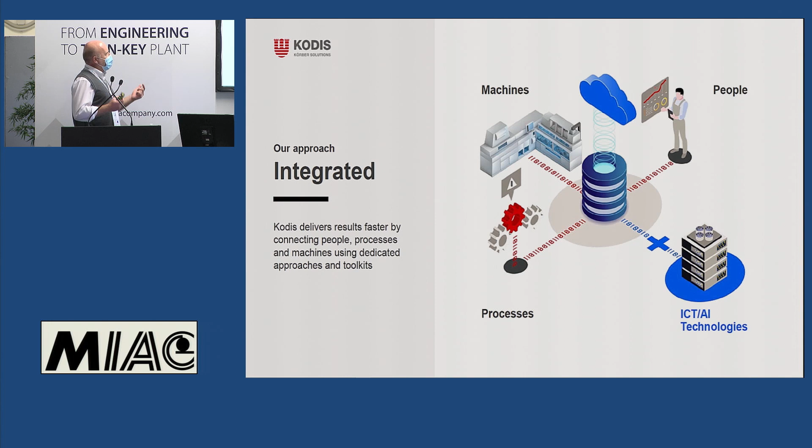With the MOM, we have a wider vision because we are considering all the activities, all the tasks that come from the in-feed of the material to the outbound of the material at the end, and all the operations inside that can involve automatic equipment or people activity like handling material, making quality tests, and so on.

If we consider the different layers of value, if we start from the physical layer, that is the control of the equipment, we can say the standard PLC HMI, and if we move up to the ERP or the systems that are over the factory, like artificial intelligence, moving up from the equipment to the top, the value that you have from the information is increasing. The missing layer, that is the MOM, is the one in the middle. It's the one that closes this missing gap and moves the information from the bottom to the top.

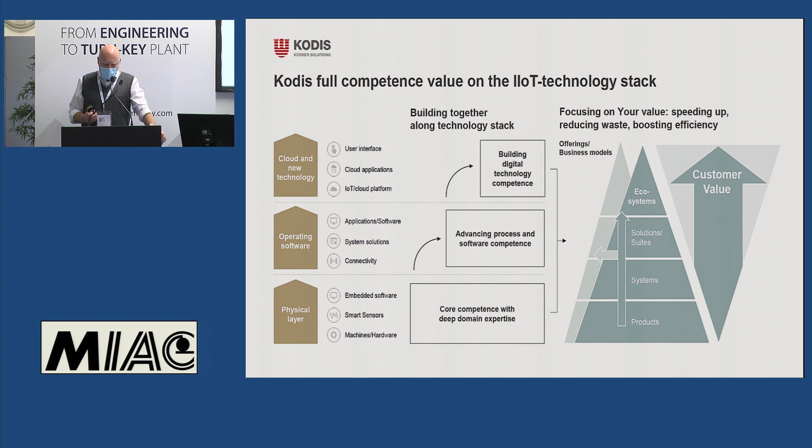This is an example of factory processes that you normally have. So you start from the raw material in-feed, you move the material to the warehouse. From the warehouse, you have to prepare the material for the production area. In this case, you have the different steps of production. You can have storage of semi-products before the final product, and you have additional material that has to be moved and synchronized with your operation.

So all these factory operations need to be split and divided into different small tasks that can involve people, can involve machines, can involve AGVs, if you have some automatic movement of the material inside the factory. And this is the layer of the entire MOM solution.

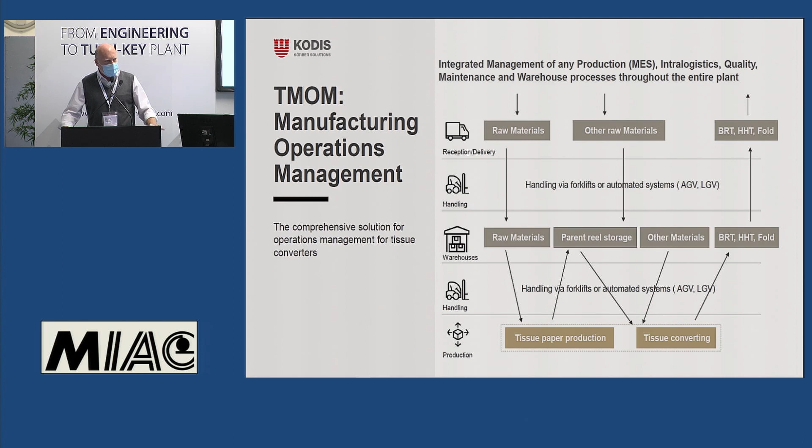Here there are some questions, a list of questions that you may ask yourself in order to understand if some of these issues or pain points are present in your factory, in order to understand if you have this kind of missing layer that needs a MOM solution that organizes everything. For example, if we consider one of them, the paperwork, the second one.

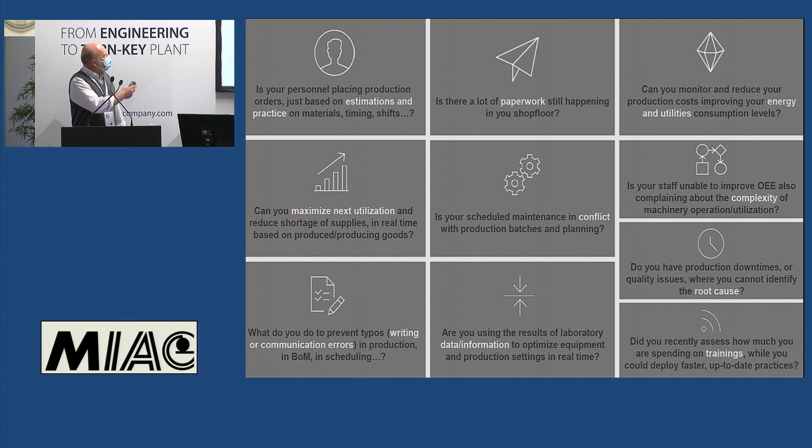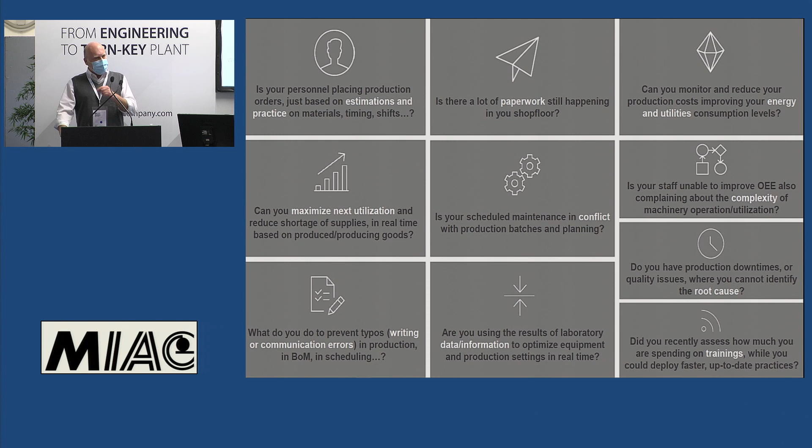So if you still move all your information and data to the operators, in order to execute all their activities, with a lot of paper. Also to retrieve information, you need to collect the quality checks, all the information of the production on paper, and transfer this paper later on into your ERP system. All this can be done automatically by a MOM system, a software that keeps the ERP synchronized, always in real time, and transfers via interface all the information to the operator without the need for any paper around the factory.

As well for material validation. If you have situations of waste in production because there is no control of the material that is moved from the warehouse to the production area, and there is no validation of the material, there can be mistakes. The operator has a paper list and has to check one by one, but there is no validation, no verification.

In that case, you can have waste in production, and this waste can be reduced using a software that organizes all the movement, requests the material just in time when it's needed at the line, and ensures that the correct material with the correct code is provided at the right moment.

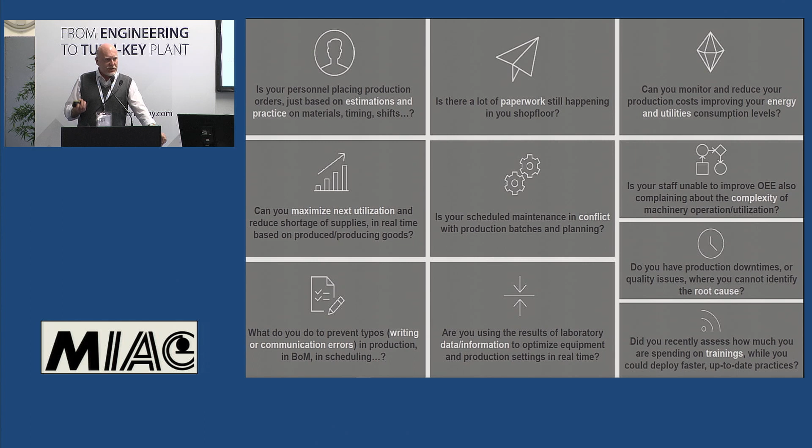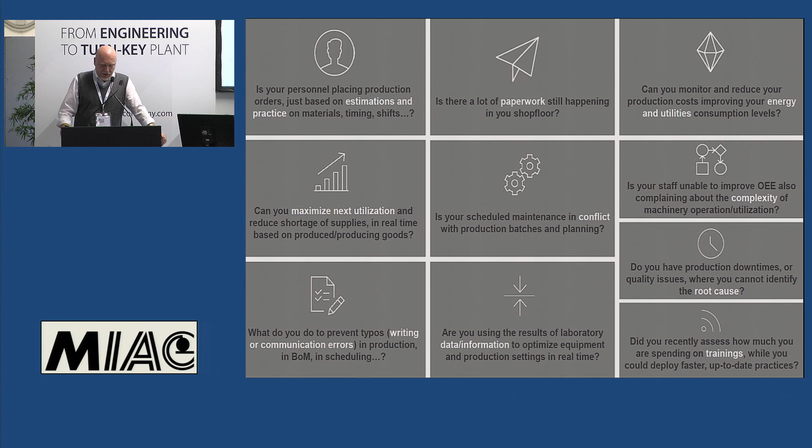Another thing, which you can also see in the demo later on in our booth, concerns energy. If you have no measurement of your consumption and your energy, you are not able to understand the cost of your product. So if in your factory you don't know exactly the cost in terms of energy of each unit of product, a MOM solution that collects all the information on energy consumed and merges it with the production scheduling is able to calculate exactly your unit cost. So all these questions that you may have in your factory can be solved with a MOM solution.

So at the end, if we want to resume what MOM means, or which are the operations of the factory, you can consider these 4 pillars. One is related to the maintenance of the equipment. One is the production, organization, and operation. Normally, the production pillar is what we call MES. We have the quality operation that must be organized, and the inventory. For inventory, we mean warehouse system, intralogistics, material handling, and movement.

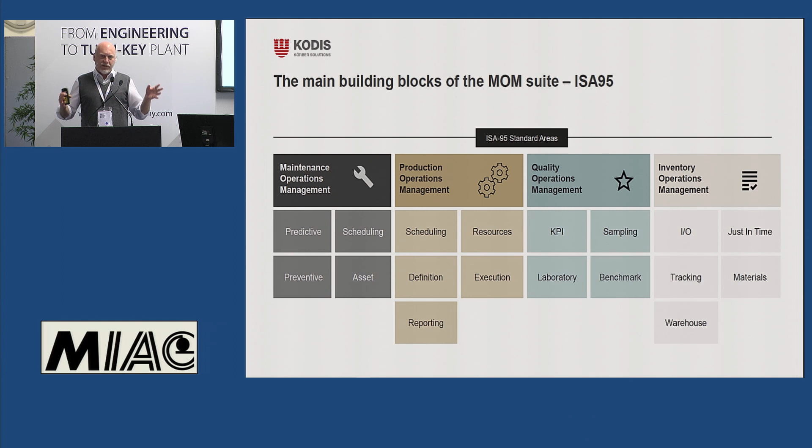As you can see, each of these pillars can be divided in different functionalities or macro functionalities. That means that you don't have to think of a MOM as a unique software, but it's a modular software, so you can choose and pick the module that you want and integrate with the existing software, because each factory already has software. It doesn't mean that you have to take off your old software and put a completely new software for any kind of operation. The scope is to use the existing software, integrate it together, and have an orchestration of all your activity at a common layer.

These are the modules that we created specifically for the tissue. And all these modules, you can have a demonstration in our booth. The first one is an MES for converting line. The functionality is not only collecting the OEE, but also organizing the article, defining the product, creating the scheduling of production. The system is connected directly with the ERP, so we can download from the ERP the list of orders.

In real time, we are connected to the machine, so we can update the real status of execution, collect the data, make the report, and advise the operator time by time of any activities to do, like collecting quality, making the quality check, justifying the downtime if you have downtime of the line, and automatically creating all the forms to collect the information that is the result at the end of the report of each production. This is the MES for converting.

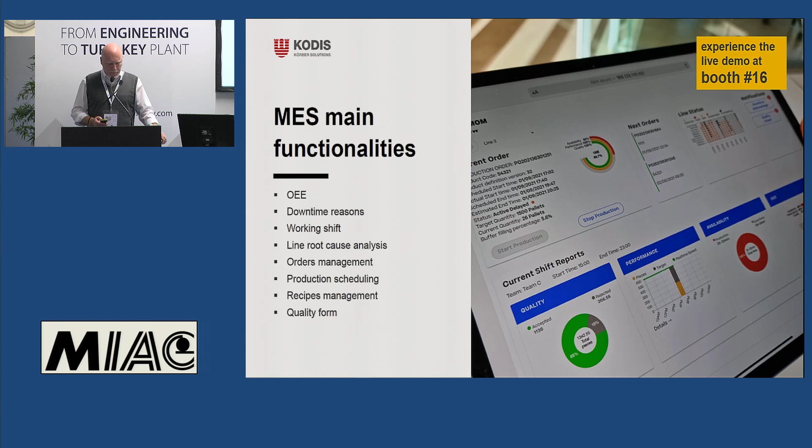Another application that is related to the maintenance is CMMS. In that case, we are focusing not on the production, but on the maintenance activities. So we have a tool that organizes all your maintenance. We can provide the tool already prepared with all the tasks, all the activities, and all the maintenance cards related to the equipment that you have in the factory.

This allows you to create a preventive organization of your maintenance, because each task is organized in a scheduling with a time that is coming directly from the machine, so we know the running time of the machine, and we can automatically activate the scheduling of the task based on the real working of the machine. So you create your preventive planning.

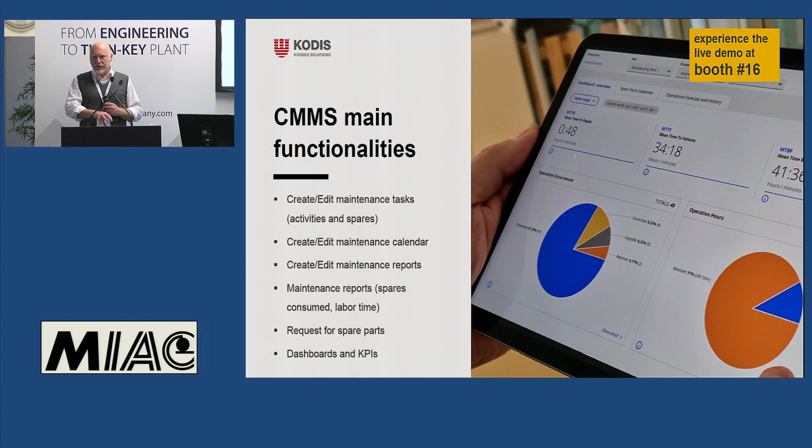And of course, we record all the information coming from the operator. The operator can inform the system of the spare parts used, the consumption of the spare parts, and in case of Körber tissue machines, we are connected directly to the customer portal, and you can order the spare parts directly from this tool to the customer server.

The last one is what we call building energy management system. It's a system that monitors your energy consumed, and at the same time, it's organizing and scheduling all the utilities around the production. When we say utilities, we mean conditioner, air compressor, everything that you need in terms of resources for the production. With this tool, you can synchronize your utility management with the production, and you can schedule your utilities in automatic mode in order to start exactly when you need them for the production. When you don't need them anymore, you don't need to keep them open, but you can close them automatically.

We collect the energy consumption, and as I said before, we synchronize the energy consumption and the production, and with this tool we are able to provide you the single cost of production unit.

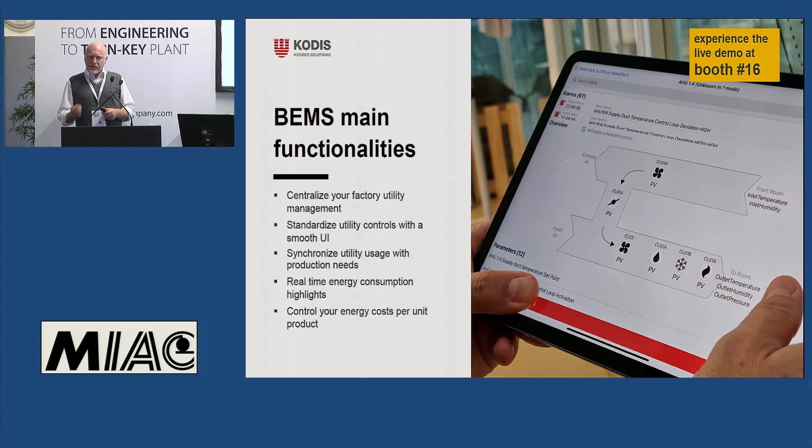Okay, this is our history, we can say. It's 15 years that we are doing MOM software for different factories. And one of our goals this year is that we were nominated as a standard provider for a big company, and we are in a rollout phase of more than 20 factories around the world, where they chose our MOM solution as the standard for the entire company. So we are talking about 400 warehouses, 340 secondary work centers, 30 process lines, and so on. So we are not new. It's not something that we have just created for this exposition.